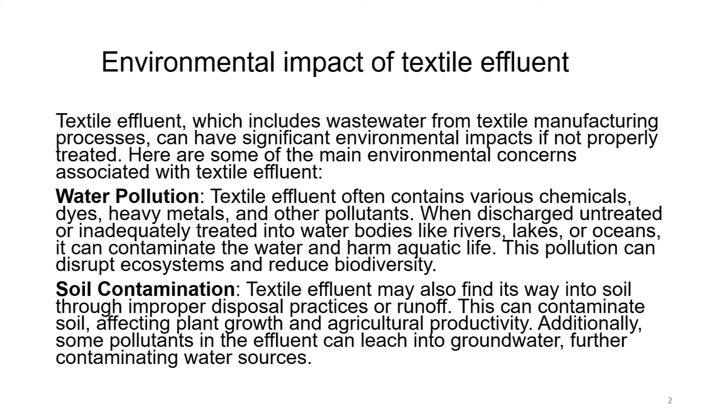Soil contamination. Textile effluent may also find its way into soil through improper disposal practices or runoff. This can contaminate soil, affecting plant growth and agricultural productivity. Additionally, some pollutants in the effluent can leach into the groundwater, further contaminating water sources. So, it is water pollution, it is soil contamination causing all kinds of problems in the ecosystem.

Air pollution. Certain volatile organic compounds, that is VOCs, and other chemicals present in the textile effluent can evaporate into the air, contributing to air pollution. This pollution can pose health risks to nearby communities and contribute to the formation of smog and other air quality issues. Energy consumption. The treatment of textile effluent requires significant energy inputs, particularly in processes such as biological treatment or advanced oxidation. This can contribute to greenhouse gas emissions and exacerbate climate change.

Microplastics. Textile effluent can contain microplastics, which are tiny plastic particles shed from synthetic fabric during washing. These microplastics can enter water bodies and marine ecosystems, posing risk to aquatic organisms and potentially entering the food chain. We had not spoken so far about microplastics because we were only concentrating on the organic pollutants, the dyes, the PAH, the pesticides, the emulsifiers, the surfactants, heavy metals, but this is another new problem. So, we have to address all these very carefully because all of them eventually have environmental impact.

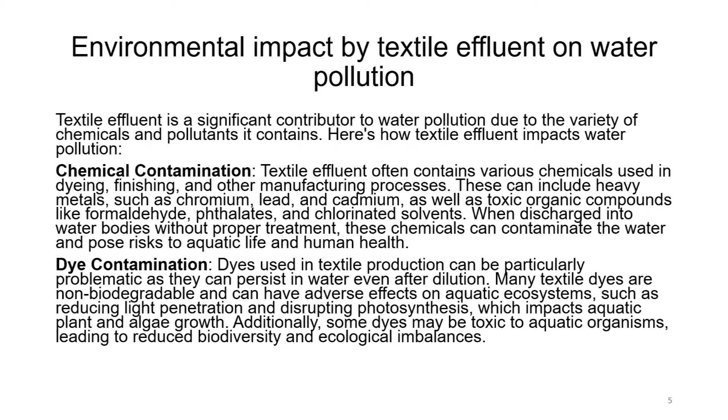pH imbalances. Textile effluent can also alter the pH levels of water bodies. Certain textile processing chemicals such as alkalis and acids used in dyeing and finishing can increase or decrease the pH of water, leading to acidity or alkalinity. Fluctuations in pH can disrupt aquatic habitats and impair the ability of aquatic organisms to survive and reproduce.

Nutrient imbalance. Textile effluent may contain nutrients such as nitrogen and phosphorus, which can promote eutrophication when discharged into water bodies. Eutrophication occurs when excessive nutrients stimulate algal growth, leading to algal blooms.

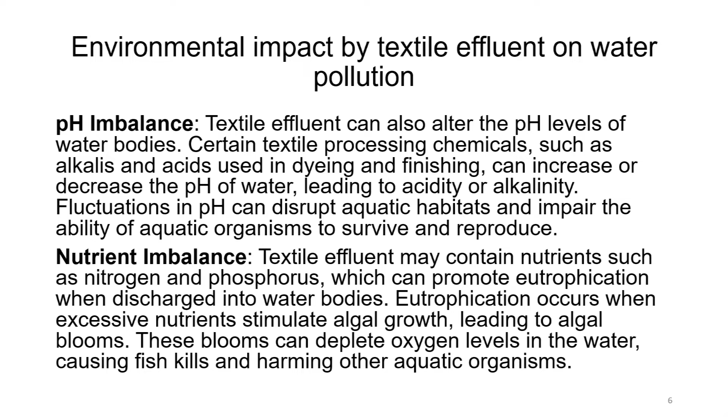These blooms can deplete oxygen levels in the water, causing fishes to get killed and harming other aquatic organisms.

Sedimentation. Textile effluent may carry suspended solids and sediments which can cloud the water and impair light penetration, causing turbidity. This can affect the growth of aquatic plants and benthic organisms as well as disrupt sediment dwelling species. Excessive sedimentation can also smother habitats such as coral reefs and aquatic spawning grounds.

To mitigate the water pollution caused by textile effluent, it is crucial to implement effective wastewater treatment technologies. So, one thing is sure, that because the pollution problem increases so much because of the untreated wastewater being discharged into the water bodies, one has to take very serious measures: enforcing regulatory standards for pollutant discharge, promoting the use of eco-friendly dyes and chemicals in textile production, and encouraging the adoption of water recycling and reuse practices within the textile industry.

Additionally, public awareness and education about the environmental impacts of textile pollution can help drive consumers' demand for sustainable and responsibly produced textiles. And as I told you in one of the lectures, even the consumer has become very aware, and they know if the product is made sustainably, they promote and buy those kinds of products because they are sure that the end result of this production has been looked into very seriously and there are no adverse environmental impacts.

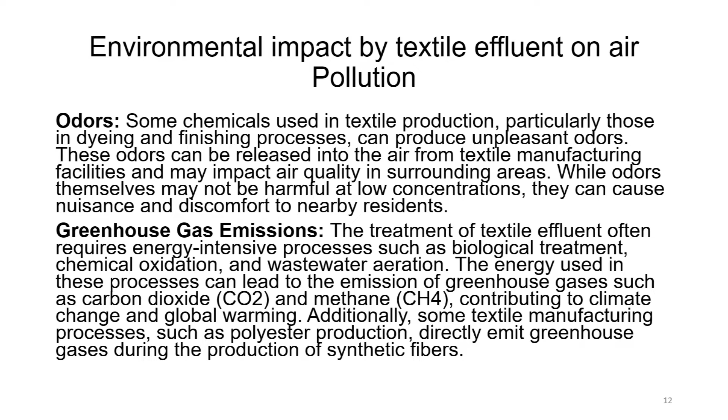Additionally, some textile manufacturing processes such as polyester production directly emit greenhouse gases during the production of the synthetic fibers. So, these gases, carbon dioxide and methane, can also be extremely harmful and can be an addition to the air pollution. Indoor air quality.

In addition to outdoor air pollution, textile manufacturing can also impact indoor air quality in production facilities and surrounding areas. Poor ventilation combined with release of VOCs, particulate matter and odorous compounds can create unhealthy indoor air conditions for workers and nearby residents.

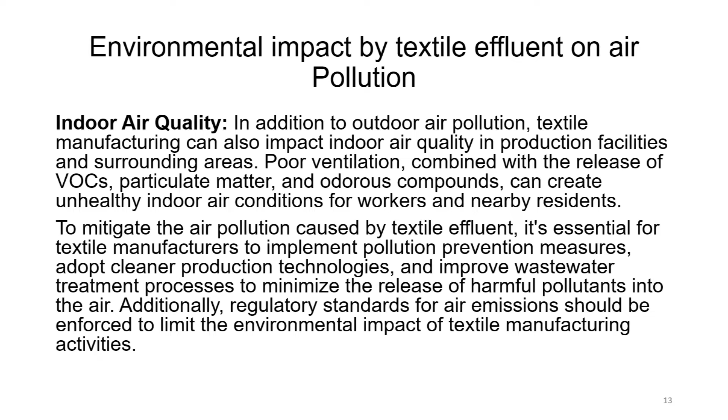To mitigate the air pollution caused by textile effluent, it is essential for textile manufacturers to implement pollution prevention measures, adopt cleaner production technologies and improve wastewater treatment processes to minimize the release of harmful pollutants into the air. Additionally, regulatory standards for air emission should be enforced to limit the environmental impact of textile manufacturing activities. Now, rules have been laid down for all these emissions, but it is for the textile manufacturing units to follow them.

How does energy consumption impact the environmental situation? The energy that is consumed for textile effluent. Textile effluent indirectly contributes to energy consumption primarily through the treatment processes required to mitigate its environmental impact. Here is how textile effluent impacts energy consumption. Wastewater treatment. Now, every process would require energy.

So, wastewater treatment: one of the primary ways textile effluent affects energy consumption is through the energy intensive processes involved in wastewater treatment. Treating textile effluent to remove pollutants and contaminants typically requires various treatment methods such as physical, chemical and biological processes, and this we have learnt earlier.

These treatment processes such as aeration, filtration and chemical oxidation often require significant amounts of electricity to operate pumps, mixers, blowers and other equipment. The energy demand for wastewater treatment can be substantial, especially in large scale textile manufacturing facilities or in regions with strict environmental regulation.

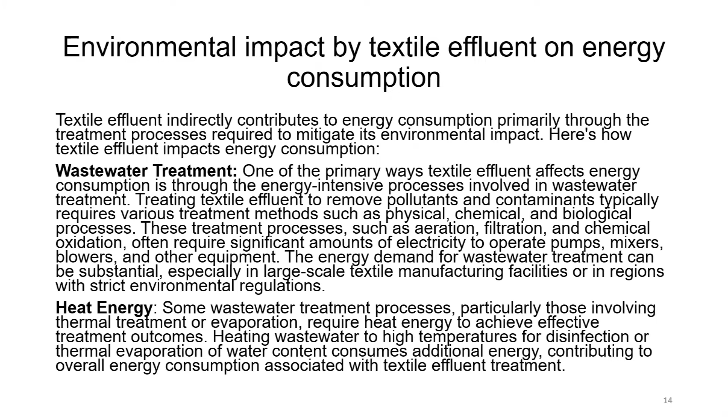Heat energy. Some wastewater treatment processes, particularly those involving thermal treatment or evaporation, require heat energy to achieve effective treatment outcomes. Heating wastewater to high temperatures for disinfection or thermal evaporation of water content consumes additional energy, contributing to the high overall energy consumption associated with textile effluent treatment. So, we know that at every stage energy is being used, or for evaporation heat is being used, which is indirectly coming from energy. So, it is quite intensive in the processes.

Transportation also requires energy consumption. Energy is also consumed in transporting textile effluent from manufacturing facilities to wastewater treatment plants if they are not located in the same premises, or to transport sludge. Depending on the distance and transportation mode used, trucks or pipelines, energy may be expended in pumping, trucking and other transportation activities. Resource extraction and processing.

The production of chemicals, materials and equipment used in wastewater treatment processes also requires energy. For example, the production of chemicals used for coagulation, flocculation and pH adjustment in wastewater treatment involves energy intensive processes such as chemical synthesis and purification.

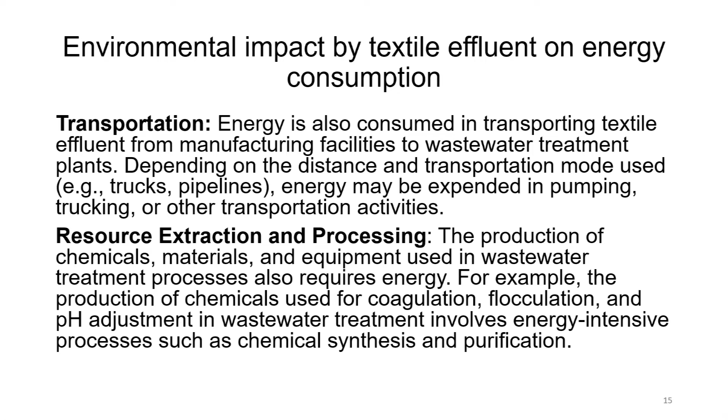Water recycling and reuse. In some cases, textile manufacturers may invest in water recycling and reuse systems to minimize freshwater consumption and lessen wastewater generation. While water recycling can reduce the environmental impact of textile effluent, the implementation and operation of these systems may require additional energy inputs for water treatment, filtration and distribution.

To minimize the energy consumption associated with textile effluent, manufacturers can implement energy efficient technologies and practices in wastewater treatment processes. This may include optimizing treatment plant design, using energy efficient equipment, implementing process controls to minimize energy use and exploring renewable energy resources such as solar or biogas for on-site energy generation.

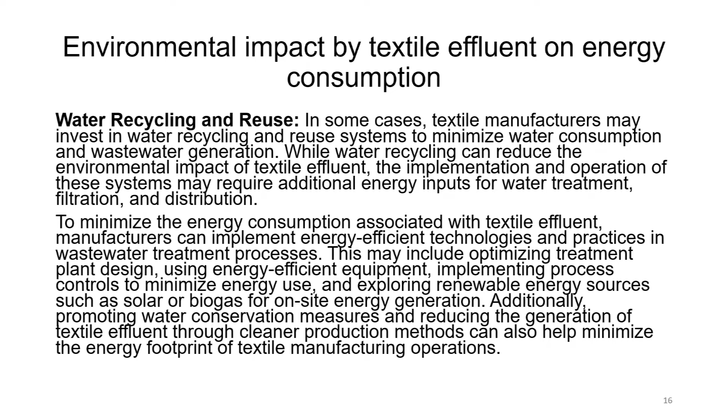Additionally, promoting water conservation measures and reducing the generation of textile effluent through cleaner production methods can also help minimize the energy footprints of textile manufacturing operations. Textile effluent contributes to microplastic pollution, this we have just learned, which has become a significant environmental concern globally, because this is a newly found contaminant which is having an adverse effect on the environment.

Microplastics are tiny plastic particles measuring less than 5 millimeters in size, and they can originate from various sources including the breakdown of larger plastic items, abrasion of synthetic textiles and the discharge of microbeads from personal care products. Here is how textile effluent impacts microplastic pollution.

Synthetic fiber shedding. Synthetic fibers such as polyester, nylon and acrylic are commonly used in textile manufacturing. When textiles made from these synthetic fibers are washed, or during production processes like cutting and sewing, they shed microplastic fibers. These microplastic fibers are released into the wastewater and can end up in textile effluent.

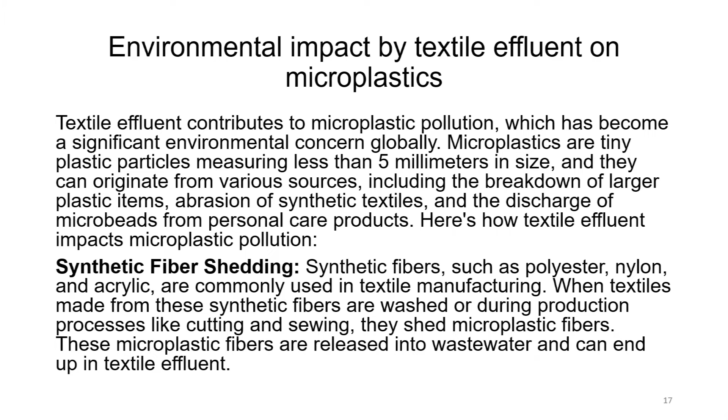Wastewater discharge. Textile effluent which contains microplastic fibers shed from synthetic textiles is discharged into wastewater treatment plants or directly into water bodies. However, conventional wastewater treatment processes are not designed to effectively remove microplastics from effluent, leading to the release of microplastics in the environment. As I told just a while ago, microplastics have been identified as one of the major pollutants recently which is impacting the environment. The conventional methods have not been designed to remove them.

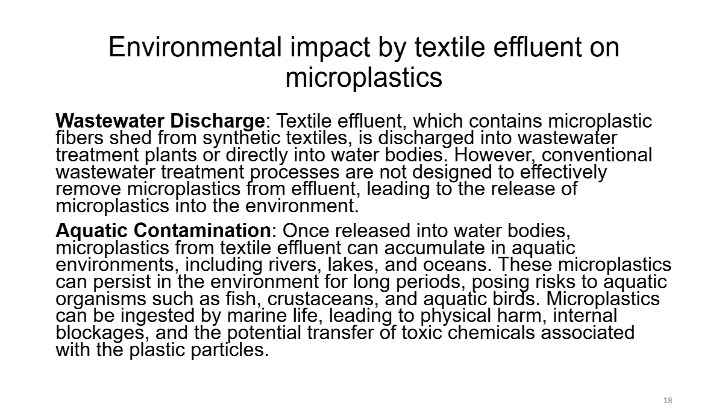Aquatic contamination. Once released into water bodies, microplastics from textile effluent can accumulate in aquatic environments, including rivers, lakes and oceans. These microplastics can persist in the environment for long periods, posing risk to aquatic organisms such as fish, crustaceans and aquatic birds. Microplastics can be ingested by marine life, leading to physical harm, internal blockages and potential transfer of toxic chemicals associated with the plastic particles. So, there can be a very serious impact of microplastics.

Bioaccumulation. Microplastics can bioaccumulate in the food chain, starting from small aquatic organisms and eventually reaching larger predators including humans. This bioaccumulation process can lead to the magnification of microplastic concentrations and associated contaminants in organisms at high trophic levels, posing risk to ecosystem health and human health.

Ecological impact. Microplastic pollution from textile effluent can have detrimental ecological impact, this we have understood very clearly by now, including disruption to marine ecosystems, alteration of food webs and habitat degradation. Additionally, microplastics can serve as vectors for harmful microorganisms and pollutants, further exacerbating environmental risk.

To address the environmental impact of microplastics from textile effluent, efforts are needed at various stages and levels, including developing and implementing wastewater treatment technologies specifically designed to capture and remove microplastics from the effluent. There is a need for development of such methods and technologies, promoting the use of sustainable and biodegradable alternatives to synthetic fibers in textile production, raising awareness among consumers, textile manufacturers and policy makers about the environmental consequences of microplastic pollution and the importance of mitigating its impact.

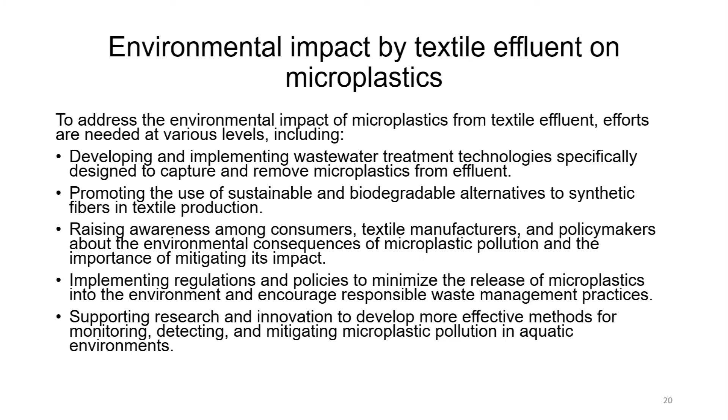Implementing regulations and policies to minimize the release of microplastics into the environment and encourage responsible waste management practices. Supporting research and innovation to develop more effective methods for monitoring, detecting and mitigating microplastic pollution in aquatic environments.

Now, let us move on to ecotoxicity. What is the environmental impact of textile effluent? Textile effluent can have significant ecotoxicological impact due to the presence of various chemicals and pollutants that are toxic to aquatic organisms and ecosystems. Here is how textile effluent contributes to ecotoxicity.

Chemical contaminants. Textile effluent contains a wide range of chemicals used in textile manufacturing processes, including dyes, finishing agents, solvents and heavy metals. Many of these chemicals are toxic to aquatic organisms even at low concentration. When textile effluent is discharged into water bodies without proper treatment, these chemicals can accumulate and pose risk to aquatic life, including fish, invertebrates and algae.

Acute and chronic toxicity. Some chemicals present in textile effluent can cause acute toxicity, leading to immediate harm or death of aquatic organisms upon exposure. They can be so toxic. Others may cause chronic toxicity resulting in long-term adverse effects such as reproductive impairment, developmental abnormalities and reduced growth and survival rates.

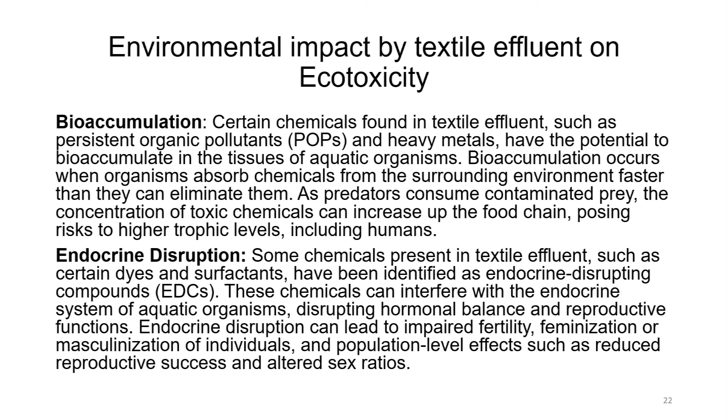Endocrine disruptors. Some chemicals present in textile effluents such as certain dyes and surfactants have been identified as endocrine disrupting compounds, EDCs. These chemicals can interfere with the endocrine system of an aquatic organism, disrupting hormonal balance and reproductive function. Endocrine disruption can lead to impaired fertility, feminization or masculinization of individuals, and population level effects such as reduced reproductive success and altered sex ratios.

Habitat degradation. Textile effluent can contribute to habitat degradation in aquatic ecosystems by altering water quality parameters such as pH, dissolved oxygen level and nutrient concentrations. Changes in water quality can impact the distribution and abundance of aquatic species, disrupt ecological processes and lead to shifts in community structure. So, even some of the species can just become obsolete because of this seriousness of ecotoxicity.

To mitigate the ecotoxicological impact of textile effluent, it is essential to implement effective wastewater treatment technologies to remove harmful chemicals and pollutants from discharge. Time and again we are talking about this, that it is a serious problem. It needs to be handled very carefully and understood very well.

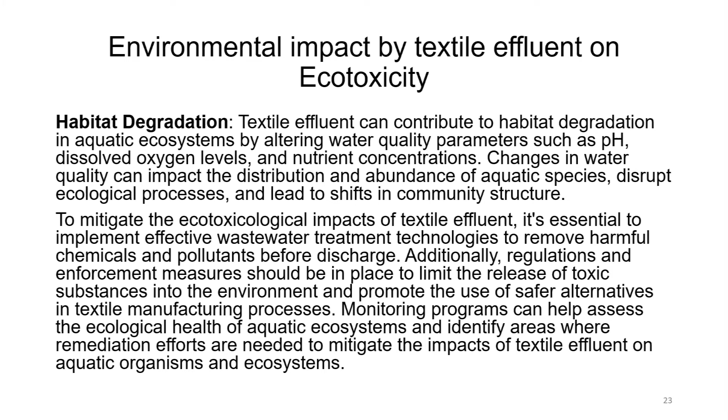Additionally, regulations and enforcement measures should be in place to limit the release of toxic substances into the environment and promote the use of safer alternatives in textile manufacturing processes. Monitoring programs can help assess the ecological health of aquatic ecosystems and identify areas where remediation efforts are needed to mitigate the impact of textile effluent on aquatic organisms and ecosystems.

Technological advancement in wastewater treatment to prevent environmental impact. We have studied that all these new technologies that are being introduced are primarily to reduce the contaminants or pollutants. So, technological advancements in wastewater treatment have been instrumental in mitigating the environmental impact, and that is the focus to deal with textile effluent.

Here are some key innovations and advancements in wastewater treatment technologies aimed at addressing the environmental challenges posed by textile effluent. So, now let us look from the environmental impact point of view. What are the technologies which are most effective? Advanced oxidation processes, AOPs.

AOPs utilize powerful oxidants such as ozone, hydrogen peroxide or ultraviolet light to degrade organic pollutants and colorants present in textile effluent. These processes can efficiently break down complex organic compounds and dyes into simpler, less harmful substances, reducing the environmental impact of effluent discharge.

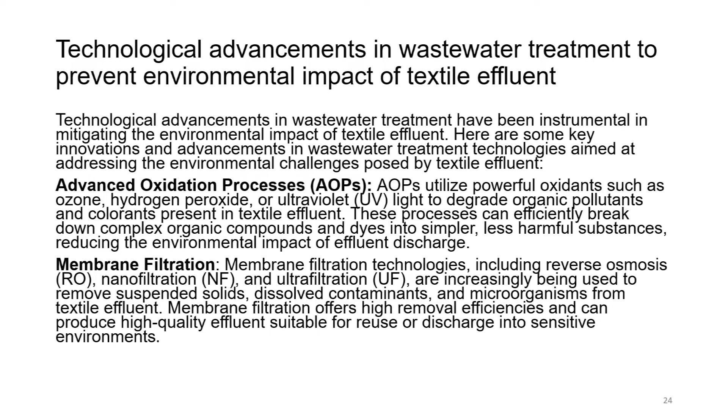Biological treatment. We have studied all this, but we are now looking from the environmental impact point of view. Biological treatment methods such as activated sludge, sequencing batch reactors (SBRs) and constructed wetlands harness the metabolic activity of microorganisms to degrade organic pollutants in textile effluent. Advances in biological treatment include the use of specialized microbial consortia, biofilm reactors and optimization of process conditions to enhance treatment performance and reduce treatment times.

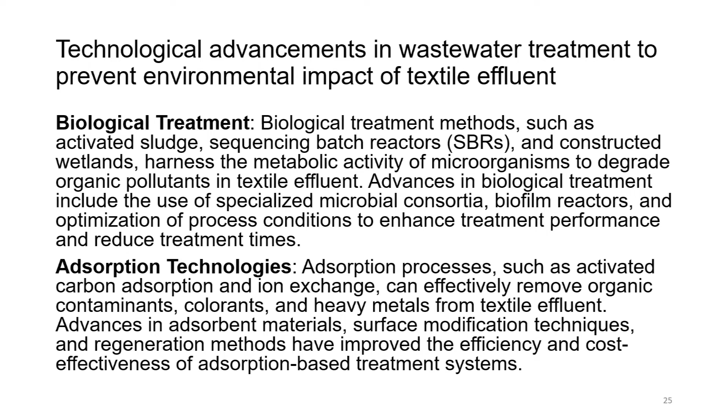Adsorption technologies. Adsorption processes such as activated carbon adsorption and ion exchange can effectively remove organic contaminants, colorants and heavy metals from textile effluent. Advances in adsorbent materials, surface modification techniques and regeneration methods have improved the efficiency and cost effectiveness of adsorption based treatment systems.

Advanced chemical precipitation. Chemical precipitation methods such as coagulation and flocculation, which we have studied many times, we are now looking at from the point of view of environmental impact reduction. They are commonly used to remove suspended solids, colloidal particles and certain organic pollutants from textile effluent. So, recent advancements in chemical precipitation include the development of novel coagulants, optimization of dosing strategies and integration with other treatment processes to enhance pollutant removal efficiency. So, the aim of advanced chemical precipitation is to remove the pollutants more efficiently.

Electrochemical treatment. Electrochemical technologies such as electrocoagulation, electrooxidation and electrochemical advanced oxidation processes, that is EAOPs, utilize electric current to facilitate the removal and degradation of contaminants in textile effluent. Electrochemical treatment offers advantages such as selective pollutant removal, minimal sludge generation and potential for on-site treatment applications.

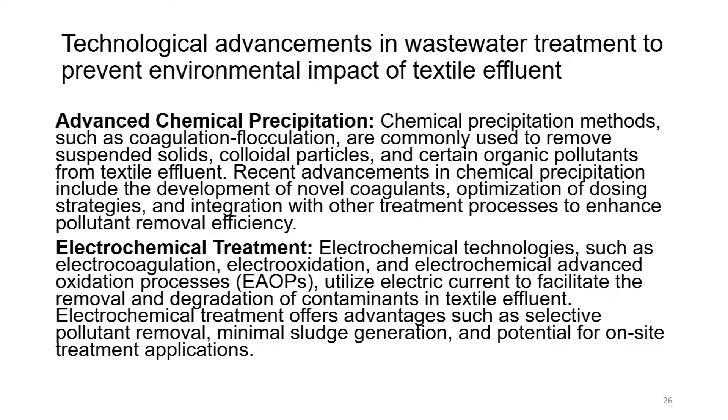Green and sustainable technologies. There is growing interest in the development of green and sustainable wastewater treatment technologies for textile effluent in the current times. World over, people are working, and globally it is of major concern that greener and sustainable technologies should be brought in. So, these would include phycoremediation using microalgae, phytoremediation using aquatic plants and biochar assisted treatment processes. These nature based approaches offer environmentally friendly solutions for pollutant removal and nutrient recovery from textile effluent.

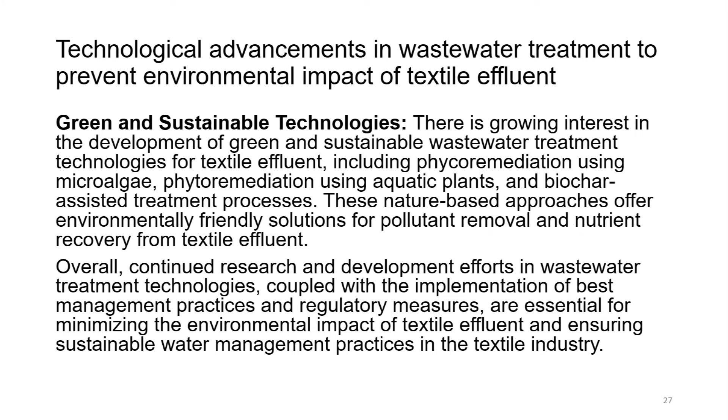Overall, continued research and development efforts in wastewater treatment technologies, coupled with implementation of best management practices and regulatory measures, are essential for minimizing the environmental impact of textile effluent and ensuring sustainable water management practices in the textile industry.

Adoption of cleaner production processes for minimizing environmental impact due to textile effluent. So, there is a need to adopt cleaner production processes in the textile industry, and it is crucial for minimizing the environmental impact of textile effluent. Cleaner production focuses on reducing resource consumption, waste generation and environmental pollution throughout the entire life cycle of the textile product. Here are some strategies and practices for implementing cleaner production processes to mitigate the environmental impact of textile effluent.

Pollution prevention. First and foremost is how we can prevent the generation of pollution. Implementing pollution prevention measures at the source to minimize the generation of pollutants and waste during textile manufacturing processes. This includes optimizing production processes, using alternative materials and chemicals, and adopting closed loop systems to minimize resource consumption and waste generation.

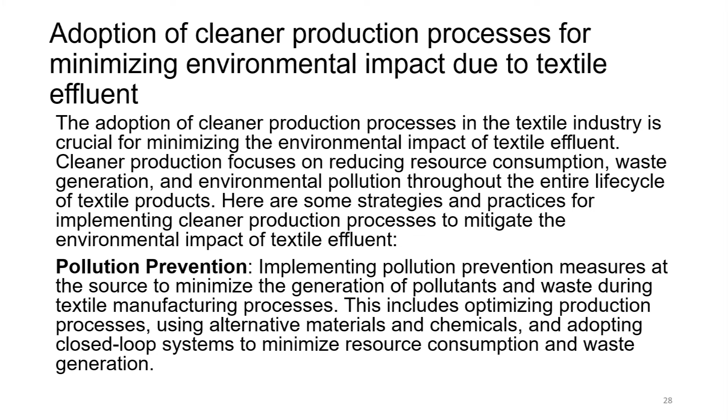Water conservation and recycling. Implementing water conservation measures to reduce water consumption and wastewater generation in textile production. This includes optimizing water use efficiency, recycling and reusing process water and implementing water saving technologies such as low water dyeing or waterless printing techniques.

Chemical management. We have spoken about chemical management: if we use less chemicals in chemical processing, only the optimal amount, then less will be disposed of in the effluent. Adopting safer and more environmentally friendly chemicals and dyes in textile production to minimize the release of hazardous substances into the environment. This includes using eco-friendly dyes and finishing agents, substituting toxic chemicals with less harmful alternatives, and implementing chemical management systems to track and reduce chemical use wherever possible.

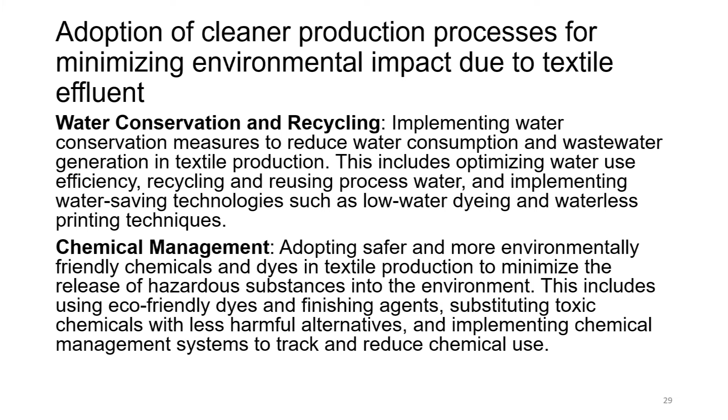Energy efficiency. Improving energy efficiency in textile manufacturing processes to reduce energy consumption and greenhouse emissions. This includes investing in energy efficient equipment and machinery, optimizing process conditions to minimize energy use, and utilizing renewable energy resources such as solar and wind power and not depending on fossil fuels.

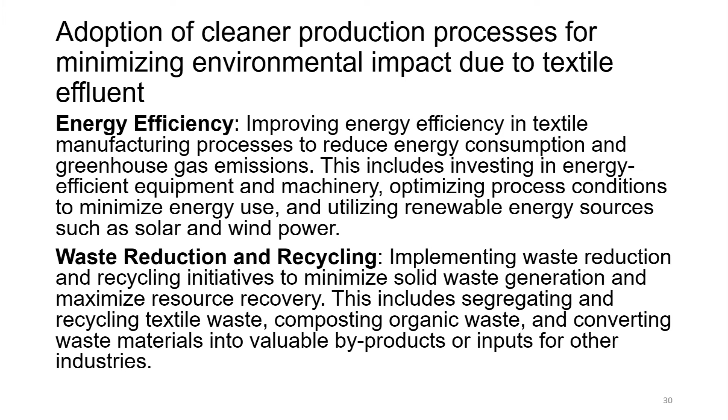Waste reduction and recycling. Implementing waste reduction and recycling initiatives to minimize solid waste generation and maximize resource recovery. We have been all along talking about resource recovery. That is because whatever useful material we can extract from the waste generated after textile processing, we should do that. This includes segregating and recycling textile waste, composting organic waste, and converting waste material into valuable byproducts or inputs for other industries.

Supply chain collaboration. Collaborating with suppliers, manufacturers and stakeholders across the textile supply chain to promote sustainability and responsible production practices. This includes engaging suppliers to adopt cleaner production methods, sourcing materials from environmentally certified suppliers, and promoting transparency and accountability throughout the supply chain. So, it is not just the responsibility of the textile manufacturer; the entire supply chain should be such that everybody feels responsible for reducing the environmental impact.

Life cycle assessment. Conducting life cycle assessments, that is LCAs, to evaluate the environmental impact of textile products from raw material extraction to end of life disposal. LCAs can help identify hotspots in the production process and inform decision making to minimize environmental impacts and improve sustainability performance.

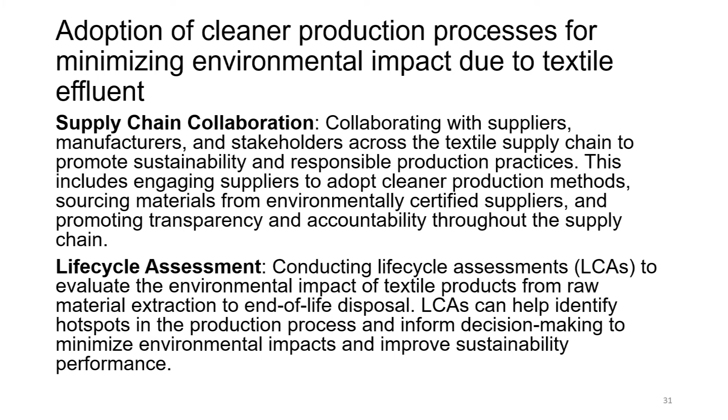Continuous improvement. There is a need for continuous improvement. Establishing a culture of continuous improvement and innovation to drive ongoing advances in cleaner production practices. Now, more and more people are driving towards cleaner technologies, and there is a lot of research happening all over the world where people are focusing on effluent treatment and developing cleaner and cleaner technologies.

This includes setting environmental performance targets, monitoring key performance indicators, and regularly reviewing and updating production processes to incorporate new technologies and best practices. Adopting cleaner processes, the textile industry can reduce its environmental footprint, minimize the generation of textile effluent, and contribute to more sustainable and responsible practices in textile manufacturing.

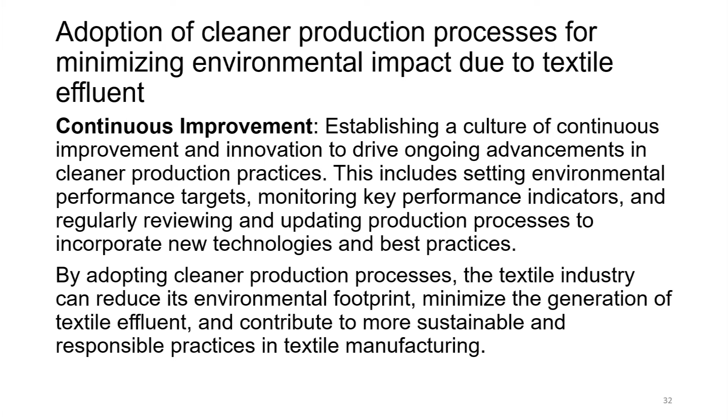So, there is a need for continuous improvement because new compounds are coming into knowledge which are impacting the environment, and therefore, newer technologies, cleaner technologies have to be devised and practiced.

So, to summarize, in conclusion, the environmental impact of textile effluent is significant and multifaceted, encompassing water pollution, soil contamination, air pollution, microplastic pollution, ecotoxicity, and energy consumption. Textile effluent contains a diverse array of pollutants including chemicals, dyes, heavy metals, microplastics, surfactants, emulsifiers, and so on, which can pose risk to aquatic ecosystems, soil quality, air quality, and human health.

These pollutants can have acute and chronic effects on aquatic organisms, disrupt ecological processes, and degrade natural habitats. Addressing the environmental impact of textile effluents requires a holistic approach that encompasses regulatory measures, technological advancements, cleaner production practices, and stakeholders' collaboration. So, it is not just one person's effort.

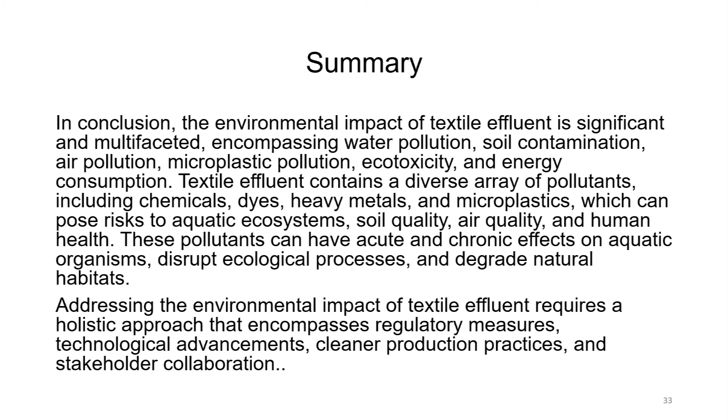All the people in the supply chain are responsible, and environmental impact is a collaborative responsibility, which requires that regulatory measures should be in place, technological advancements should be in place, cleaner production practices, and all of that should be implemented together.

So, to conclude, efforts to mitigate the environmental impact of textile effluent should focus on implementing effective wastewater treatment technologies to remove pollutants, promoting the adoption of cleaner production processes to minimize resource consumption and waste generation, and fostering sustainability throughout the textile supply chain.

Because we have to feel responsible that textiles will be formed, garments will be made as long as human beings are on this planet. But we have to keep the planet safe from all these chemical pollutants, and for that it is necessary to work on it in a very concerted manner.

Furthermore, raising awareness among consumers, industry, stakeholders and policy makers about the environmental consequences of textile effluent and the importance of sustainable textile production practices is essential for driving positive change. It cannot happen just by one person's effort. It is a collaborative effort; everybody has to feel that the environmental impact generated from textile effluent has to be reduced. So, how can we do that?